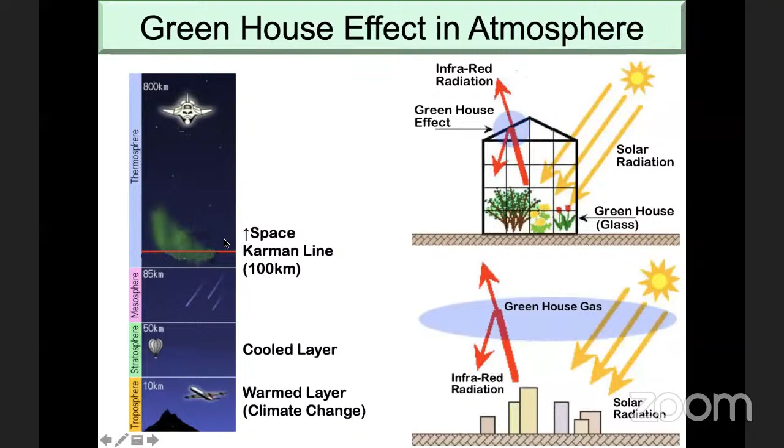Normally we think of the greenhouse effect all over the atmospheric layer. However, we have to understand that the greenhouse effect only occurs in the lowest layer of the atmosphere, about 10 kilometers. That is called the troposphere. The troposphere is normal air that we can breathe. Of course, the higher point is very thin, but almost the same contents. Above that, the stratosphere and mesosphere gradually change the contents of the air, and over 100 kilometers is called space. So please understand that the warmed layer is the bottom layer of the atmosphere, up to about 10 kilometers.

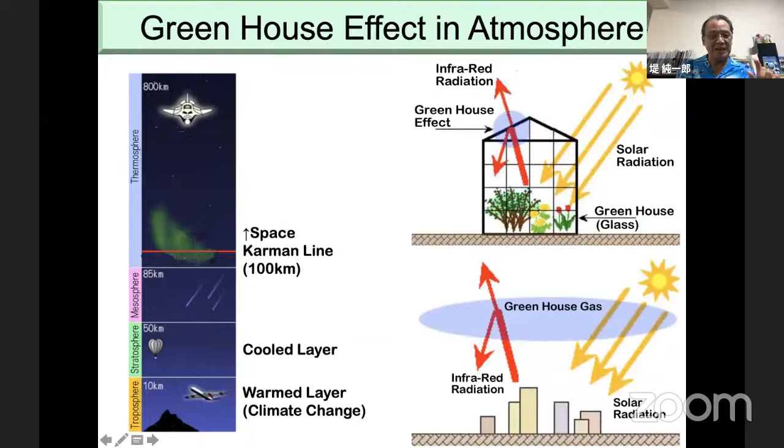Actually, at lower latitudes it's thick because of the rotation of the earth, and at the Arctic or Antarctic circle it's very thin. So anyway, about 10 kilometers, it's a very thin film of atmosphere. And in that very thin film of atmosphere, the radiation is changing gradually. At first, I will show you the third slide.

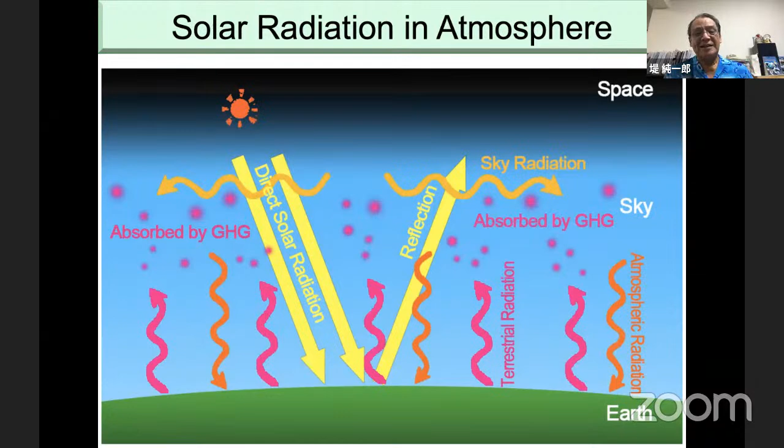However, if the greenhouse gas is a little bit too thick, it warms too much. This is climate change. So we have to look back at the history of energy right now. And in the next slide, we can understand it very well.

Before electricity, we were using firewood or charcoal or something. And after the late 18th century or 19th century, many types of fossil fuel are used to generate power. And normally, electricity is used for light or house appliances like a rice cooker, washing machine, refrigerator or something. And recently, it is used for computers or mobile phones. And also, gas is supplied for hot water supply or cooking.

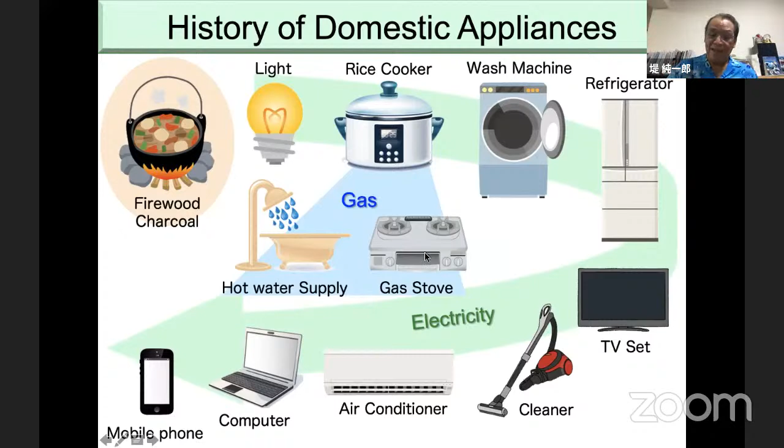And if we look back at the history of energy, the industrial revolution introduced coal to ordinary life, industrial factories or power. In the 19th century, electric power generation and supply or gas supply started. At the same time, electric power is generated by hydropower. In the early 20th century, the gasoline engine or diesel engine, that is the internal combustion engine, was invented and used for automobiles, ships or something like that.

In the 1950s, we can utilize liquefied natural gas, LNG. Japan is the biggest country to import LNG, especially from Indonesia and also from Australia. And the nuclear power plant started in the 1950s too. However, the oil crisis started in 1973, and it also occurred in 1979. Before the oil crisis, the price of oil was very, very cheap. So we could utilize it very easily, and we used oil very much.

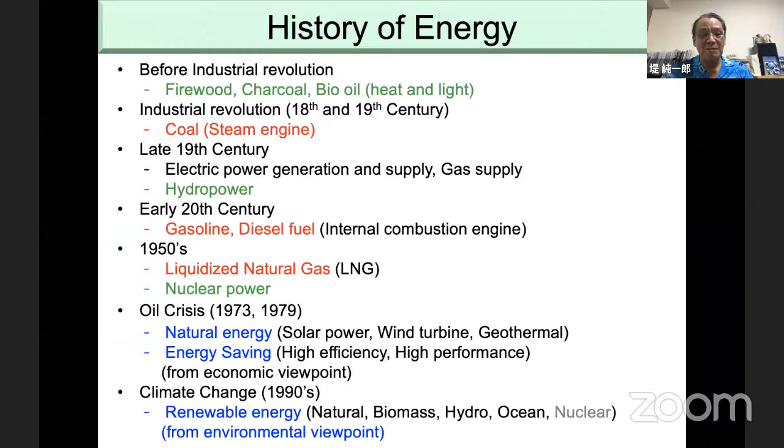Because of fossil fuel consumption, we got a lot of carbon dioxide in the atmosphere. This is the record of the carbon dioxide concentration in the world, especially in the Antarctic, and we can pick up the ice sheet of the Antarctic. It contains very old atmosphere inside the ice. So if we analyze the contents of the old atmosphere, we can get information about the concentration of carbon dioxide inside.

So about 400,000 years ago, this is moving like this, from 200 ppm to 300 ppm. It's something like ice age and warm age. Sorry, the ice age is a lower concentration, and the warm age is a higher concentration, because a lot of plants are growing, especially trees absorbing carbon dioxide. That's why the concentration of carbon dioxide is lower in the ice age.

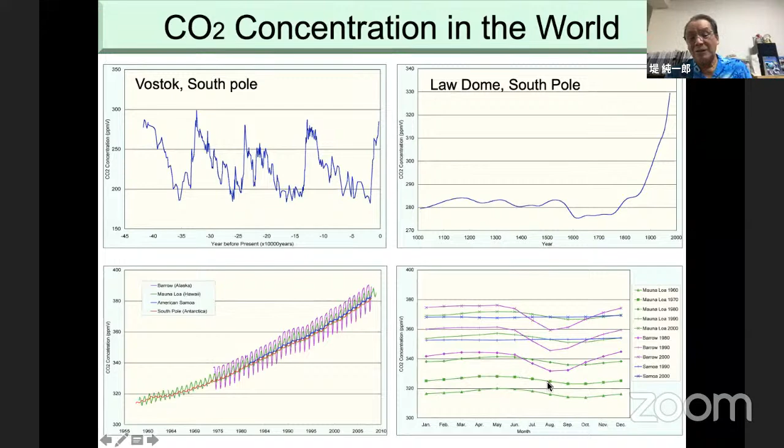Also, we are measuring the carbon dioxide concentration in Japan. It's almost the same movement. So we are measuring carbon dioxide. One is here, one is in Okinawa, and another one is in the middle of the Pacific Ocean. These 3 points show almost the same movement.

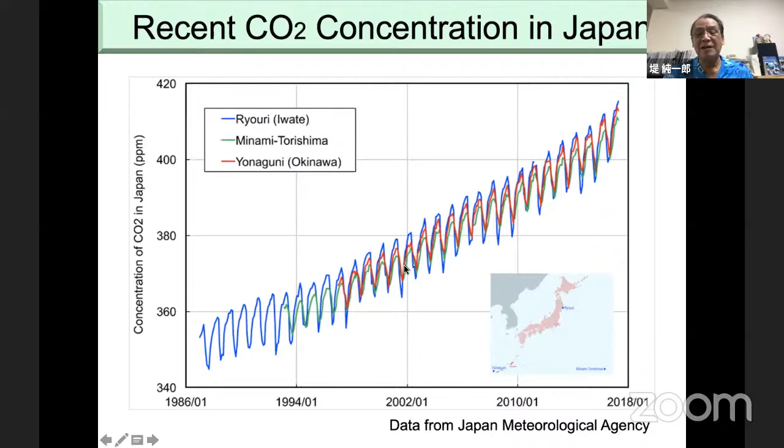So now we have to understand the greenhouse gas. Carbon dioxide makes up about 94% of the total greenhouse gas. The other greenhouse gases, that is methane, nitrous oxide, hydrofluorocarbons or perfluorocarbons or something like that, are totally 6%.

And about 90% of artificial carbon dioxide emission comes from fossil fuel. So totally, 85% of the total greenhouse gas comes from fossil fuel consumption. That is the cause of the greenhouse effect, and the greenhouse effect makes the global climate change. That's why we say greenhouse gas and fossil fuel are the main reason of climate change, and the problem of climate change is also the problem of energy.

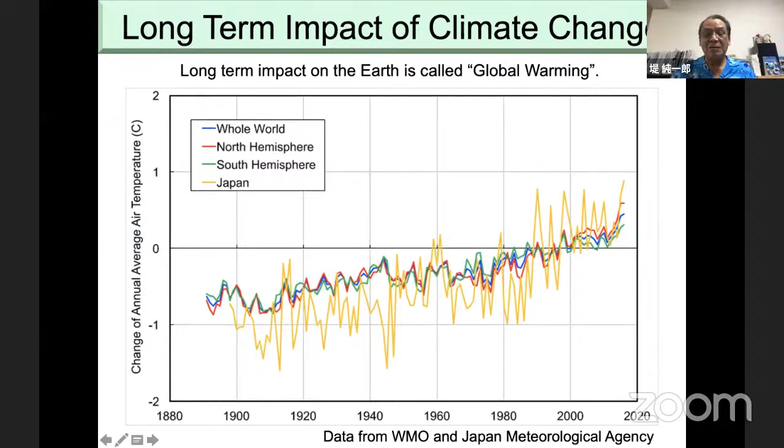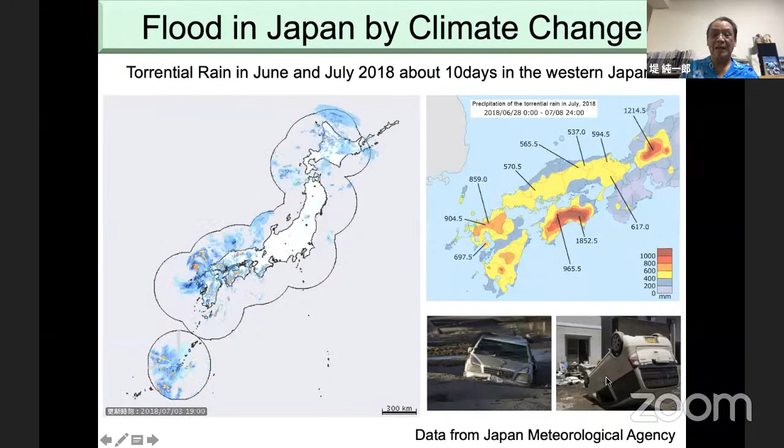And also we got very heavy storms in Japan too, almost every year recently. This is a sample from 2018. A very heavy rain cloud passed over all of Japan, and we got over 500 millimeters of precipitation in 10 days or so, and a big flood like this. It's the effect of climate change in the short term.

So we have to control climate change, and this is a strategy against climate change. First, control of carbon dioxide emission. For this purpose, we have to restrict fossil fuel consumption, and renewable energy will be provided instead of fossil fuel. Normally, we have to change fossil fuel to carbon-free or carbon-neutral energy. Carbon-free is, for example, solar power or wind turbines, and biomass energy is called carbon-neutral. And also, we have to reduce energy consumption itself. That is energy saving.

And finally, we have to think about the carbon sink. That means we directly capture the carbon dioxide in the atmosphere and put it into the earth, or sometimes we grow forests to absorb the carbon dioxide. This is the carbon sink.

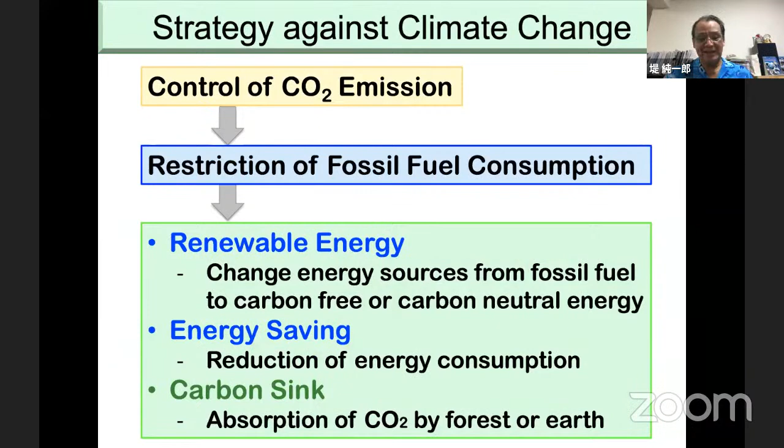So at this point, we have to talk about the ZEB. Now, what is the ZEB? ZEB means net zero energy building. The energy supply and generation move like this, and selling energy and buying energy change gradually. So if we sum up the total energy in a year, consumption and generation is zero or plus. That is called zero energy. We think about the total energy of 1 year, that's why we attach net at the head. Actually it is net zero energy building, but normally we call it ZEB.

If you are studying green buildings, it's a very good topic for you. We have to consider energy consumption in buildings, and building energy is like this, not including very special devices. These 5 categories of energy are directly connected with buildings: first, air conditioning, second, ventilation, third, lighting, fourth, hot water supply, and finally, elevators. Sometimes it includes escalators, but anyway, the moving tools. These 5 categories of energy consumption are counted for the ZEB.

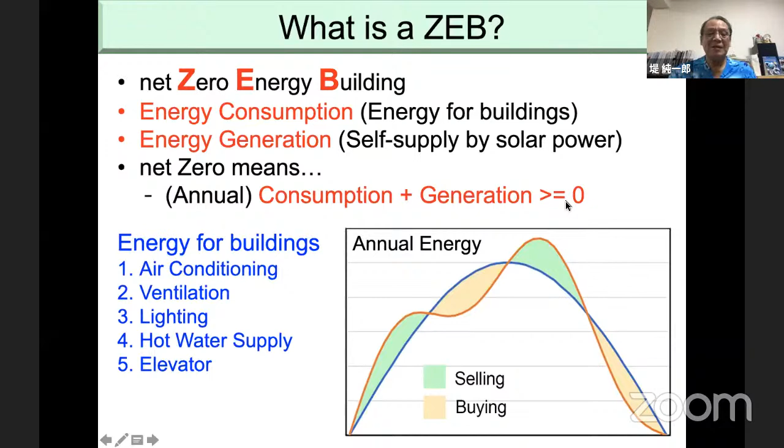First, we need to reduce the energy consumption in the building, and reasonable energy should be generated and self-supplied. So this is the real ZEB.

And the Japanese government decided the definition of ZEB like this: net zero energy buildings defined in Japan. At first, high efficiency of energy use. That means energy savings: over 50% of the normal building's energy is reduced by energy saving. And after that, over 50% is generated by renewable energy and self-supplied. And net zero is achieved. This is really called ZEB.

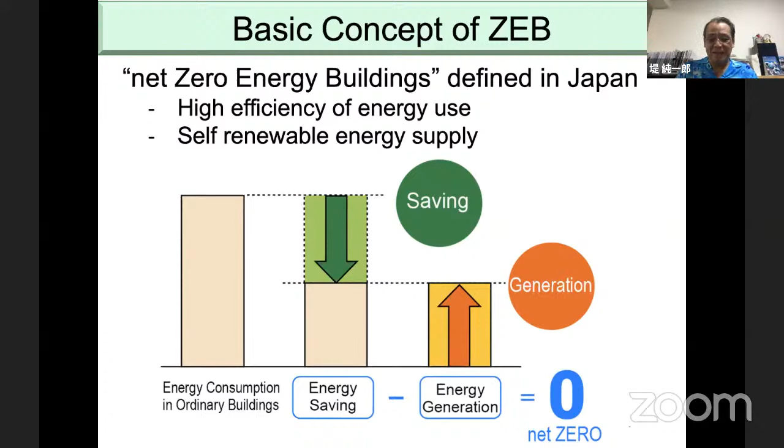So the basic concept of ZEB is, at first, an energy saving system. This is something like a Japanese system, something for reference for you, but I have to mention it. ZEB Ready, Nearly ZEB, and ZEB are defined by the Ministry of Environment Japan. At first, just energy saving buildings, over 50% than a standard building. Over 50% of energy saving plus self-energy supply over 25% is called Nearly ZEB. And finally, over 50% of self-energy supply with the energy saving is called ZEB. So energy saving is always the basic concept of ZEB.

Recently, ZEB Oriented was added to the 3 categories, for a total of 4 steps of ZEB. That was added in 2019, last year. That means 30 or 40% energy savings plus new technology to save the energy. I have to say that how to save the energy is one point. I mean that the Japanese government defined energy saving technology to calculate the energy saving ratio.

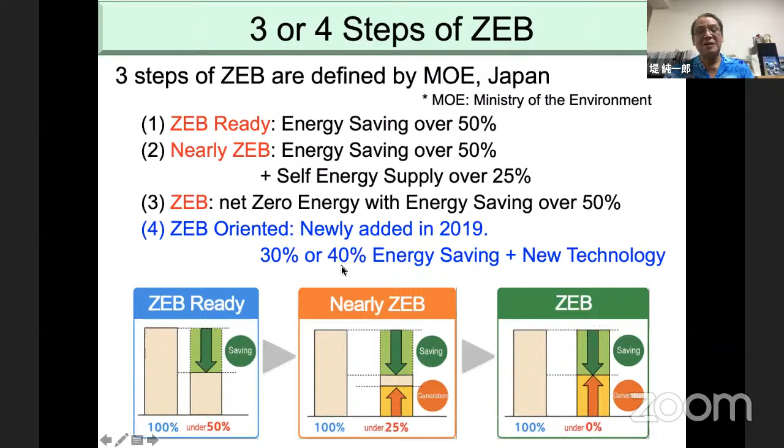However, there are much more new technologies. Therefore, we have to test the new technology, and we are also allowed to save energy by conservative technology by 30% or 40%. 30 or 40% is defined by the purpose of the building. For example, commercial buildings have to save 30%, and office buildings have to save 40%, like this. So this is the building code of ZEB. It's very legislative work, so not so interesting, but we have to understand what ZEB is.

The basic theory of ZEB is saving energy, as I said before. However, there is no code or regulation for ZEB itself in the Japanese government. Usually, we are using the Act on the Rational Use of Energy. However, it's a very old one, established in 1979. That means it comes from the oil crisis. So mainly it depends on energy management for transportation or industry and some parts of big building facilities.

However, energy consumption in buildings is a little bit different from the rational use of energy law. So that's why we have to change the legislative background of energy use. And 4 years ago, the new law on building energy efficiency was established. It's focused just on the energy efficiency of buildings. And we have to consider the regions.

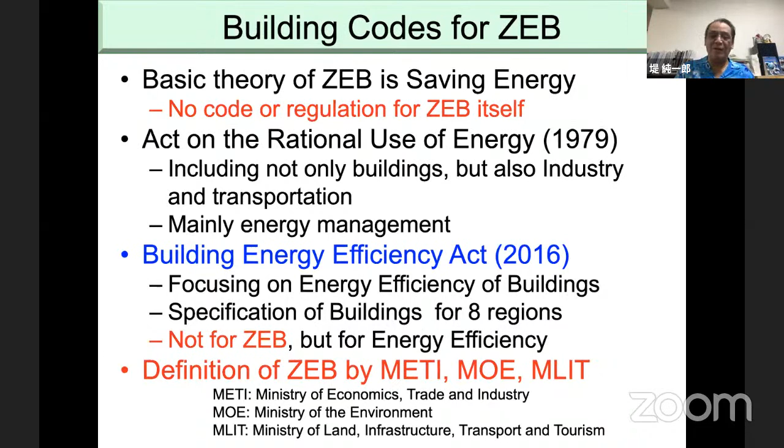However, the Japanese government, especially METI, the Ministry of Economy, Trade and Industry, the MOE, and MLIT, the Ministry of Land, Infrastructure, Transport and Tourism, these 3 ministries defined ZEB by themselves. So it is not a national law, but a national regulation of ZEB. So this is a rough sketch of the Building Energy Efficiency Act.

We have to submit the energy performance of the building before construction. I mean that at the design stage, we have to submit the energy performance to a certain authority, and if they review the application and it's good for energy consumption, they allow the building to be constructed. If not, we need to change the design again. So they have to allow construction from the aspect of energy consumption. But it's limited only to a total floor area of 2,000 and more. And smaller buildings, including residential houses over 300 square meters, just submit the calculation of energy consumption. It's just submitted, not reviewed.

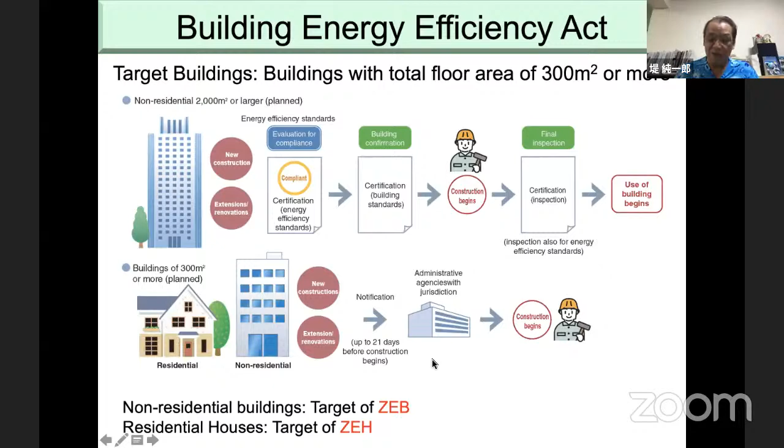So non-residential buildings are the target of ZEB. And residential houses, it's not so popular, but that is called the target of ZEH. So I'm talking only about ZEB here, non-residential buildings. Non-residential buildings have their energy consumption calculated by this part and this part. This red dotted line shows the surface of the building, the rooftop, the highest floor of the building. It's directly affected by the surrounding air. And also the 5 meters from the surface of the building is called the perimeter zone.

These perimeter zones are very important for the air conditioning system. This is calculated by PAL star or something. And also we have to calculate primary energy consumption for one year. Primary means the energy resource—I mean that we are consuming electricity or some other energy in the building, but the primary energy is the resource of the electricity. For example, if we consume 1 kilowatt hour of electricity made from oil, coal, or some other fuels, maybe it's much more, sometimes 3 times as much as the electricity. So that is primary energy consumption.

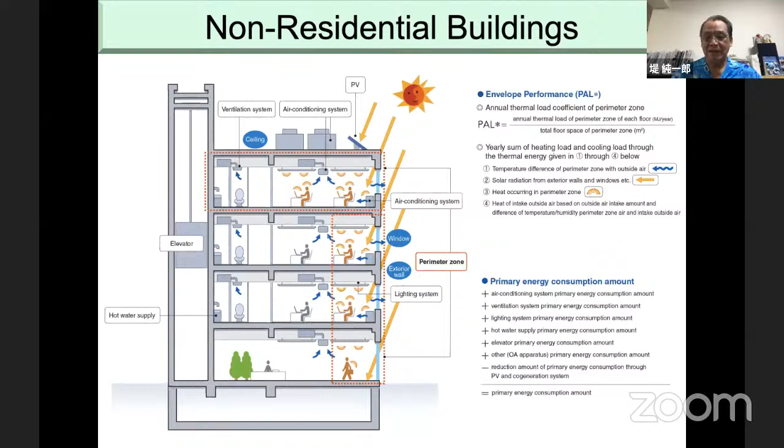So I have to touch a little bit about the technology of ZEB. Normally, we have to consider 5 types of energy consumption in a building: air conditioning system—if we think about energy saving of air conditioning, of course we need thermal insulation for wall, roof, or glass, and high efficiency air conditioning system mechanism itself. We have to use higher performance compressors or something like that. And ventilation.

Ventilation is the electric fan itself; we cannot reduce the energy anymore. Or a new type of motor control or something, but anyway, not so much reduced from the ordinary conservative style of ventilation. However, it sometimes makes a big load for the air conditioning system. That's why we have to adapt the heat exchange type. If the outgoing air is air conditioned, controlled to a comfortable zone of air temperature or something, the incoming air is outdoor air. So if the incoming air is higher than the outgoing air, it makes a big cooling load. That's why we can utilize the heat exchange type.

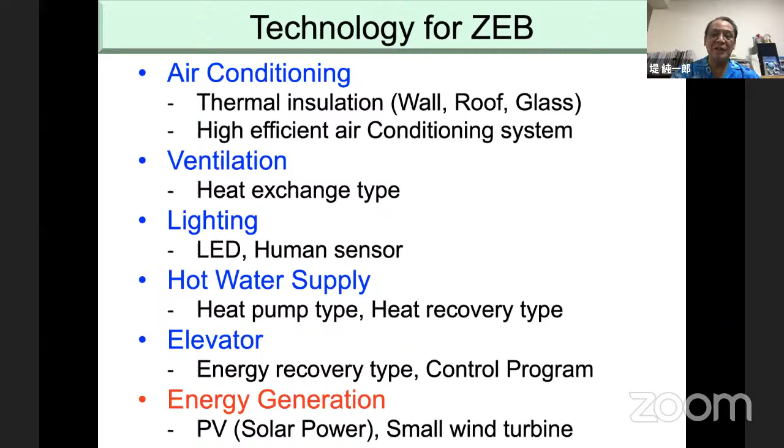And this is the energy efficiency labeling system in Japan. We call it BELS. BELS is, what do you say, one category or one ruler for ZEB. If the BELS is good, we can register the building for ZEB. At first, if someone wants to register a building for ZEB, we have to calculate BELS. BELS is one ranking system of building energy efficiency, using the Building Energy Index, BEI. This BEI is used for the energy efficiency labeling system.

The energy labeling system depends upon standard buildings. Thus, how much the energy is reduced from the standard buildings, that is the BEI. So if the design building is lower than the standard building, the BEI is less than 1. And if this is 0.5 or under, that is ZEB ready. So BELS is the ranking by BEI, and ZEB is authorized by BELS. If BEI is under 0.5, it is ZEB ready.

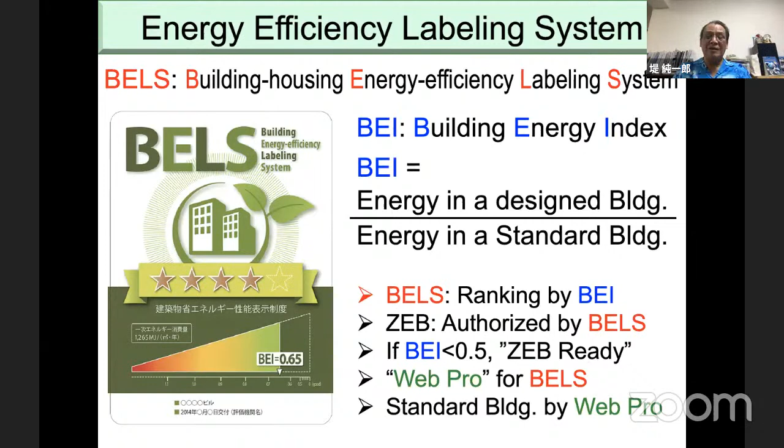I'm wondering if you're thinking about the price of ZEB. Of course we have to incorporate various energy-saving technologies in the building, so if we design a ZEB, it's a little higher or more expensive than ordinary buildings, sometimes 1.3 or 1.5 times as much.

So the financial background of ZEB is very important. That's why we have to consider the investment. Investment for the building is an important thing. If it is right and reasonable for the stakeholders, we can invest a bit more money into the building.